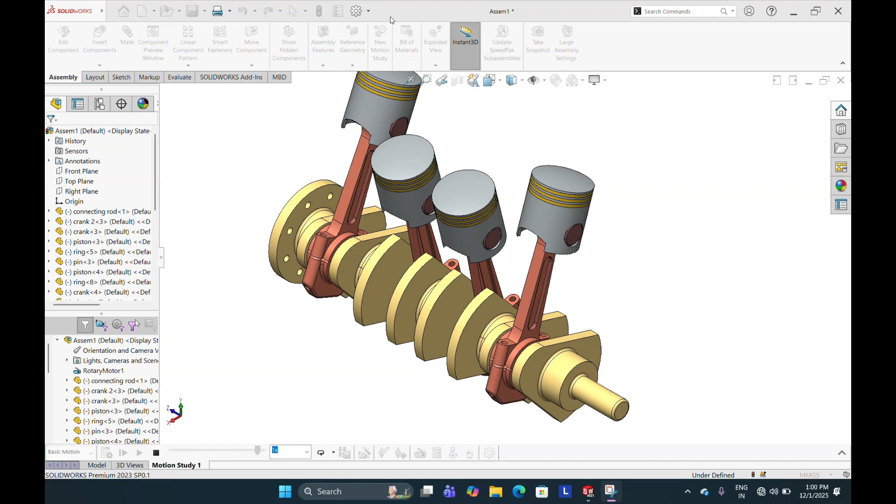Tutorial: I make a complete 4-cylinder engine assembly. Let's start by making the piston.

Select plane, sketch, circle, smart dimension 85 mm. Okay, go to feature, extrude boss, 90 mm.

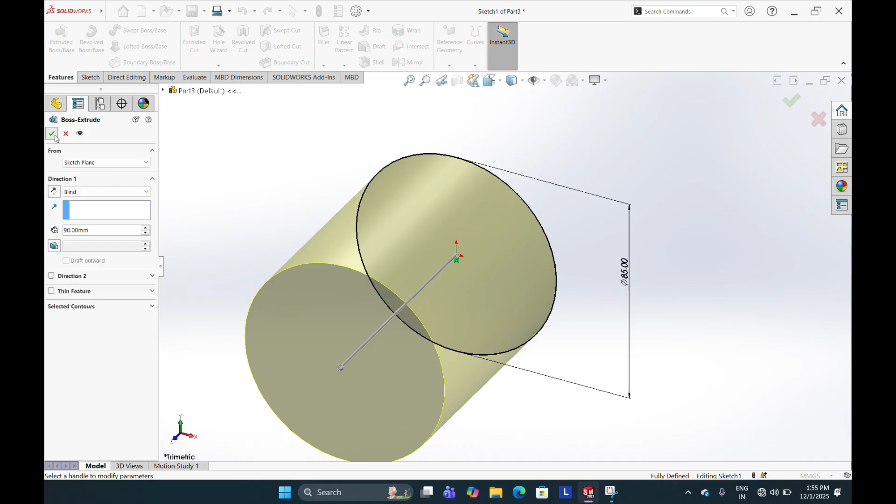Select sketch, select circle, smart dimension 79 mm. Okay, extrude cut, select offset 7.3 mm, blind 4.3, flip to inside cut. Okay.

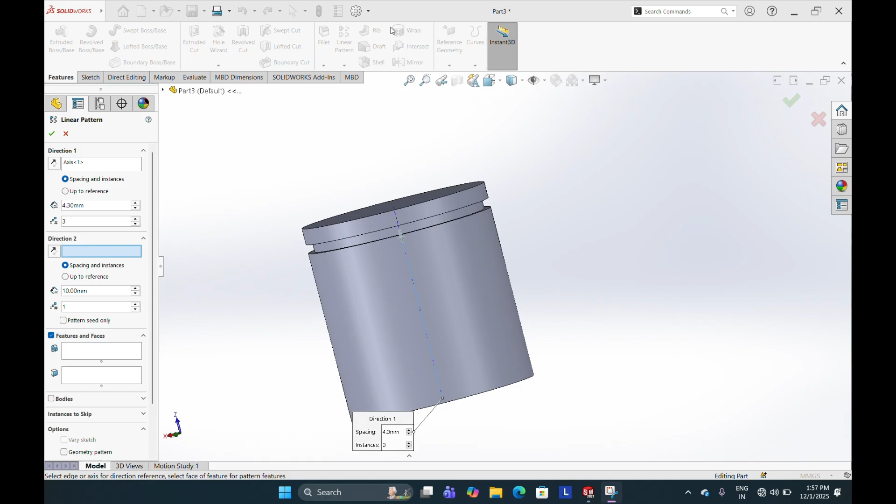Let's make a linear pattern. Direction, this direction. Select feature, this feature, 4.3 mm. Okay, hide this axis.

Five mm dome, and then 33.80 circle extrude cut, and the inner circle is 45 mm. Go to insert, feature, dome, select this face, 5 mm. Okay.

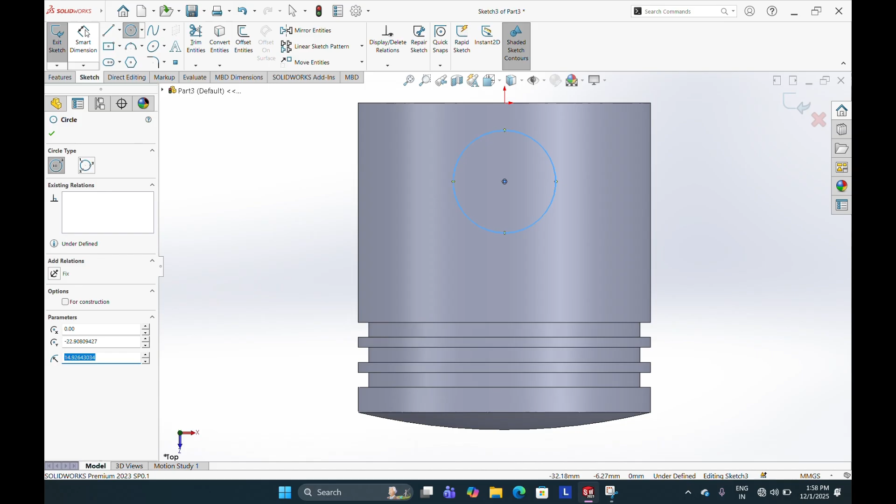Select sketch, 3 point, 80 mm distance. Okay, select mid plane. Okay.

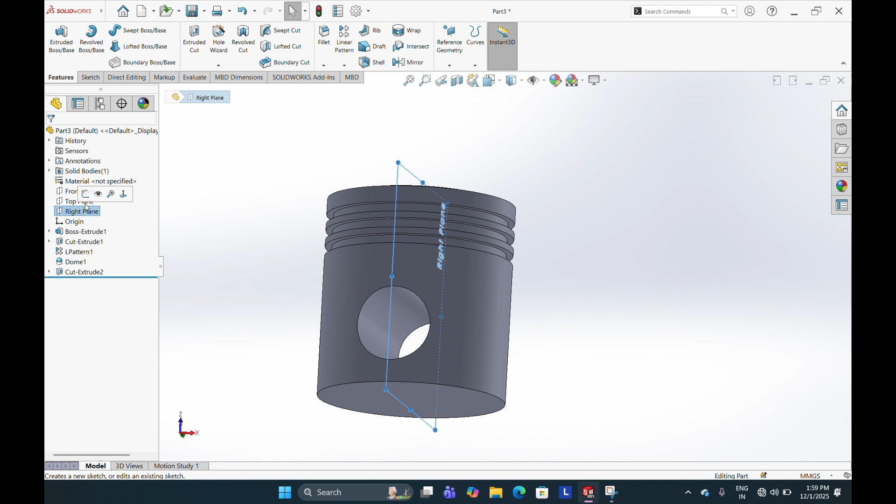Select sketch, line, smart dimension, 12 mm, 12 mm, 50 mm. Okay.

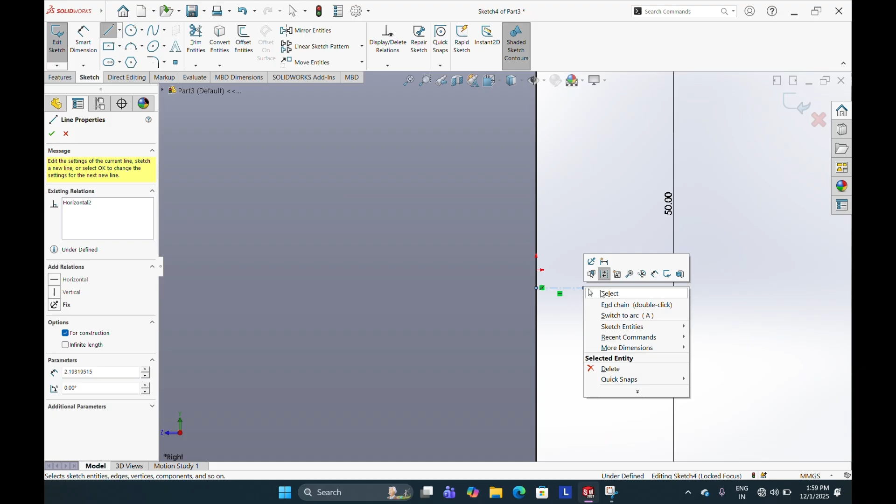Press Ctrl, select this line, make coincident. Okay.

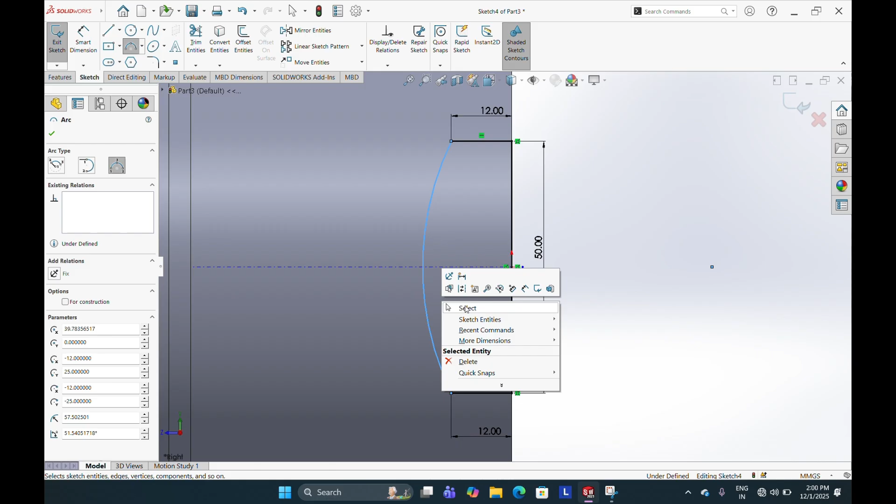Select 3-point arc, smart dimension, 40. Okay, extrude cut, okay.

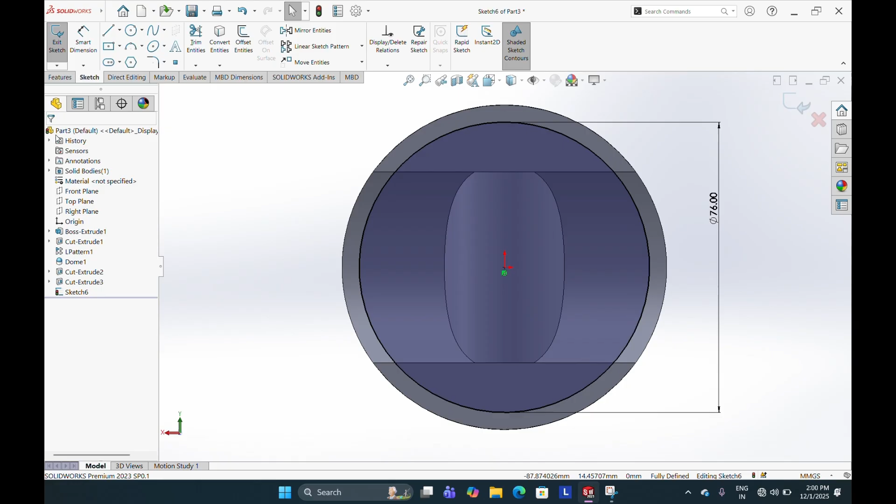Select sketch, 76 mm. Okay, go to feature, extrude cut, blind 85 mm. Okay.

Let's make the inner circle: from center to this distance 19 mm, and diameter 45 mm.

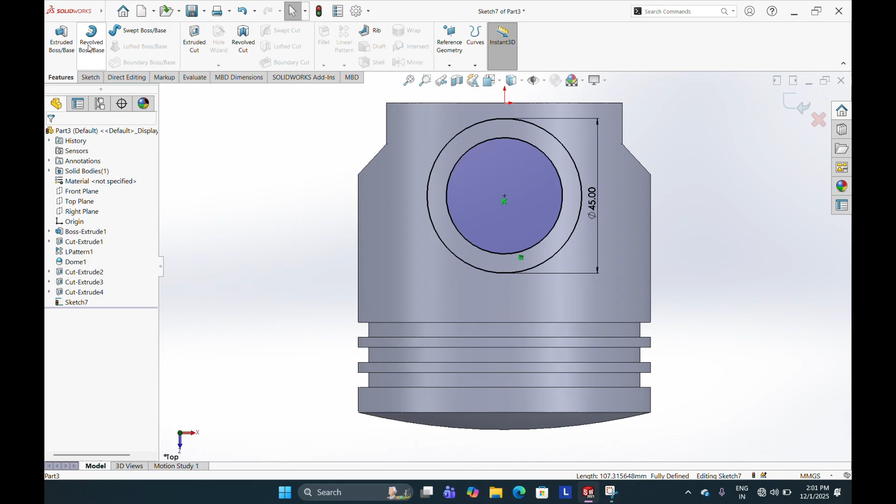Okay, select this sketch, convert entity, go to feature, extrude boss, up to next, select offset, 19 mm. Okay.

Let's mirror this feature to here. Select plane, top plane, feature to mirror this feature. Okay, our piston is ready.

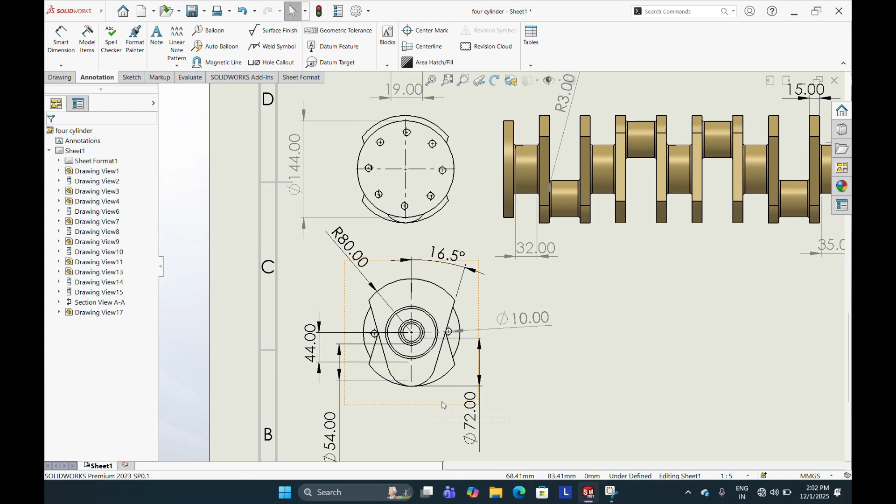Now make crankshaft. Control plus S for save. Control plus N for new part. Now let's start to make the crankshaft.

Select plane, sketch, circle, smart dimension 72. Okay, center line.

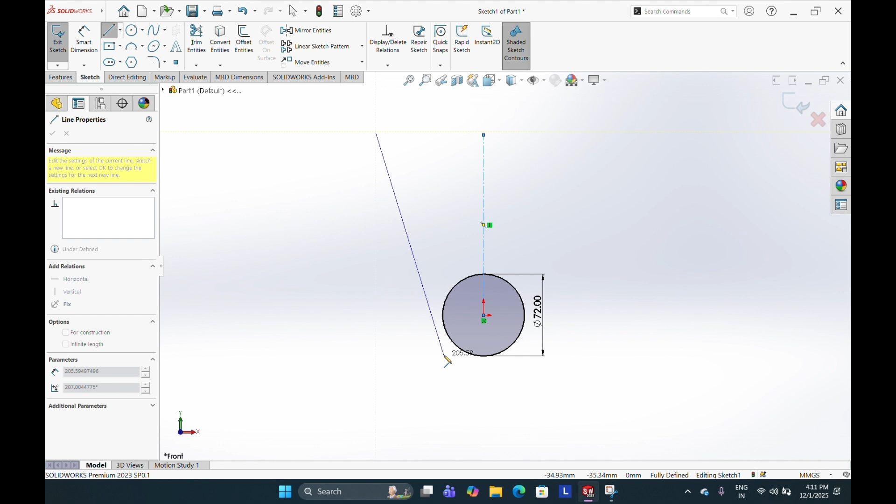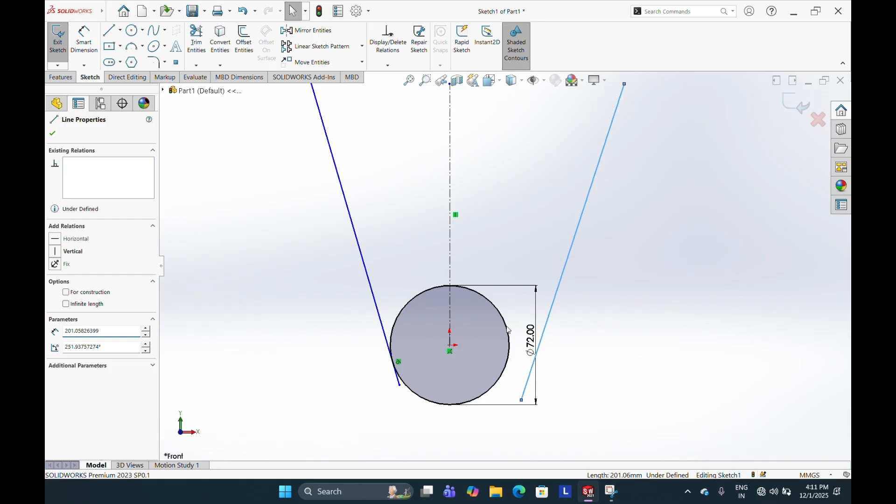Press Ctrl, select line, this edge, tangent. Okay, press Ctrl, select line, this line, tangent. Okay.

Press Ctrl, select line, this line, equal. 16.5 mm, 16.5 mm. Okay.

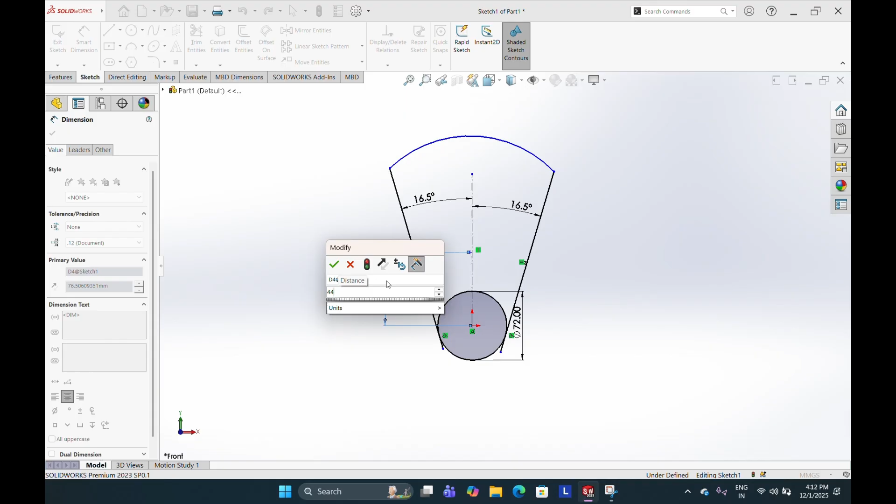Select 3-point arc, 44 mm, 80 mm. Trim entity. Okay.

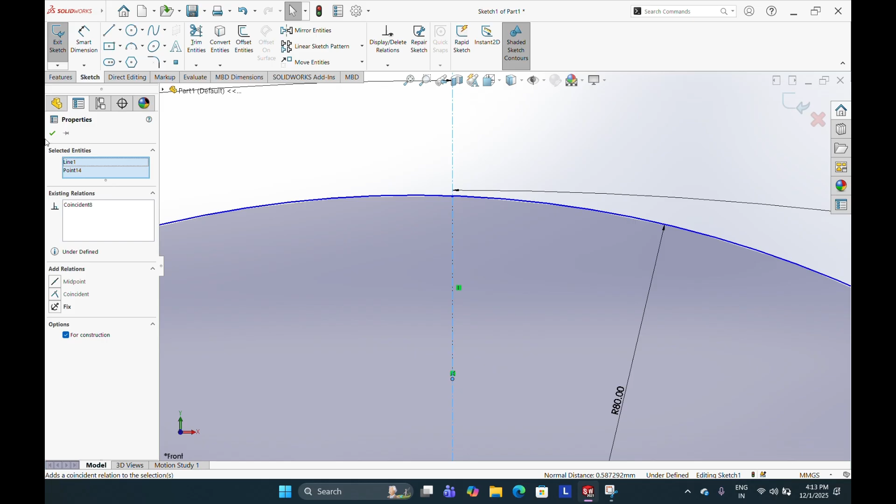Go to feature, extrude boss, 15 mm. Okay, select sketch, circle, smart dimension, 54 mm. Okay.

46 mm extrude boss. Okay, select sketch, circle, smart dimension, 72 mm, forty-four. Okay.

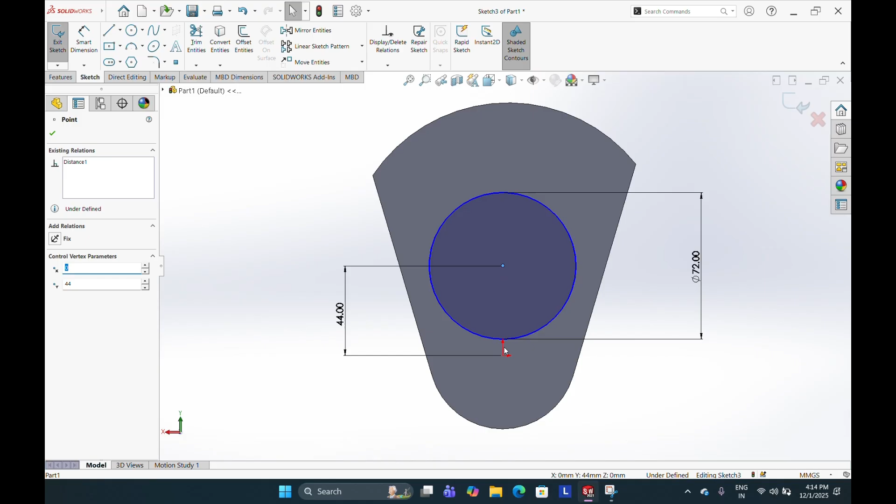Extrude boss, 38 mm. Okay.

Reference geometry, select plane. Okay, go to mirror, plane, this one, feature to mirror, this feature, this feature, and this feature.

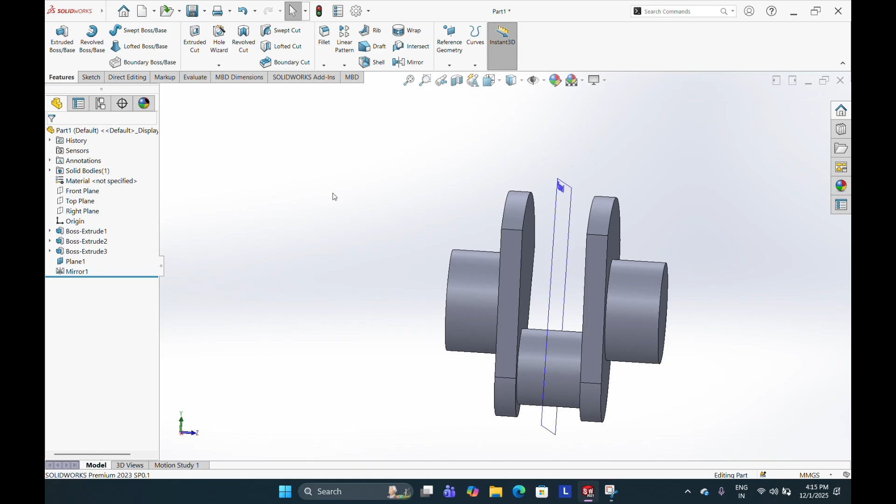Okay, hide this plane. Again select plane, this face, this face. Okay, mirror, plane tools, automatic select, feature, this feature, this feature, this and this.

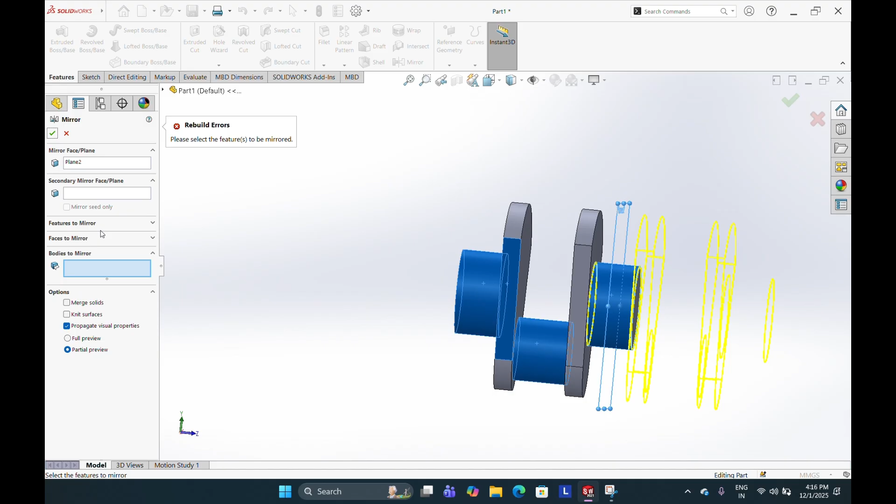Remove merge solid. Select body. Okay.

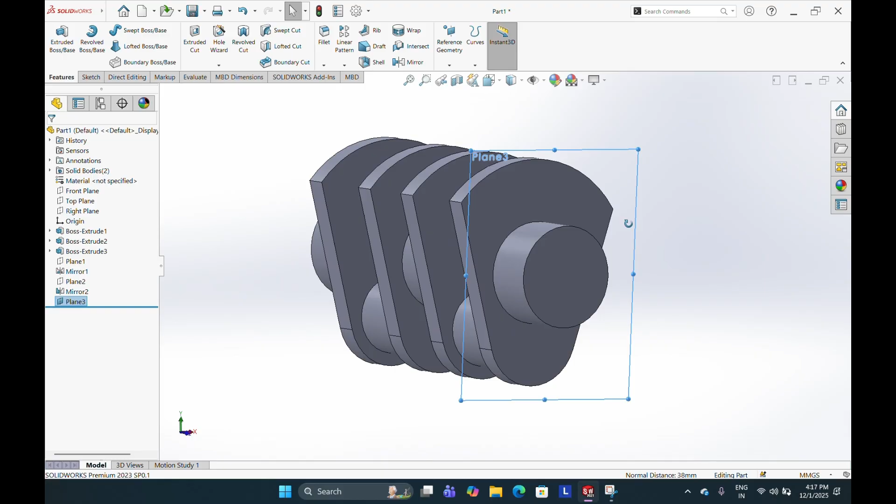Remove this face. Select plane again, this face, this face. Okay, mirror, body to mirror, this body, this body. Okay.

Go to direct editing, move copy body, or go to insert, feature, move and copy. Select this one and this one. Rotating angle 180 degrees. Okay.

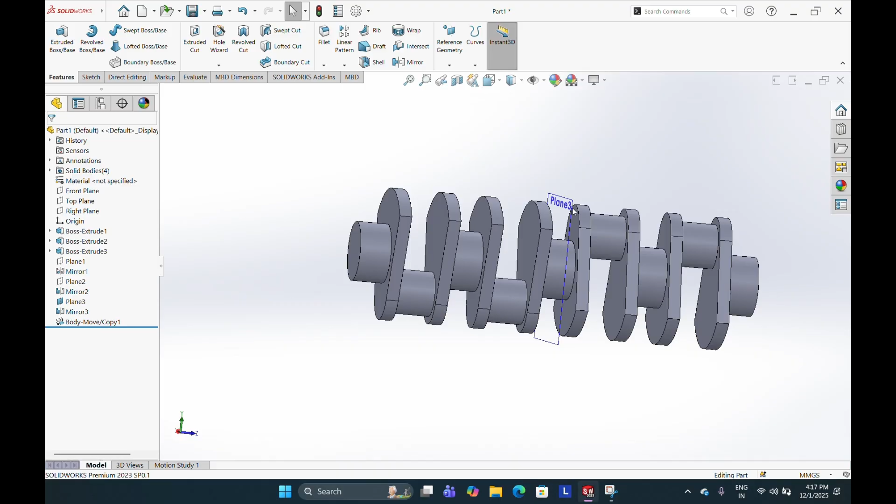Hide this plane. Select sketch here, 32 mm. Okay, go to feature, extrude boss, 80 mm. Okay.

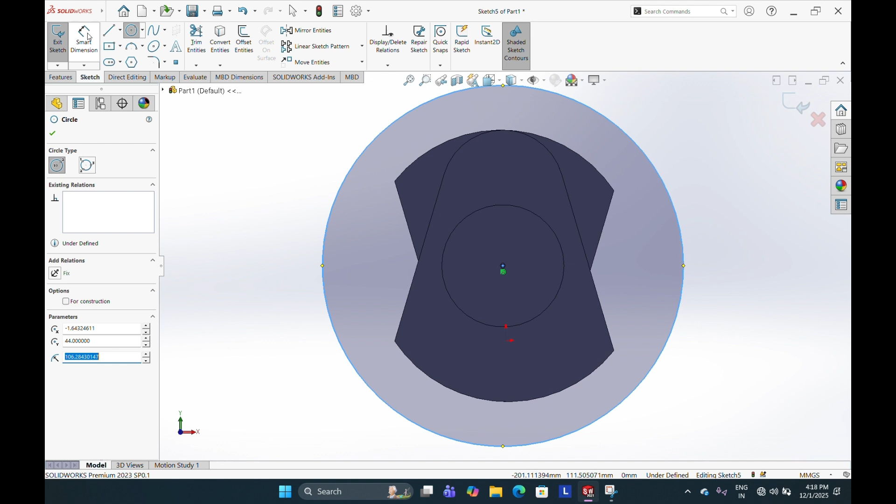Select sketch, smart dimension, 144. Select sketch, smart dimension, 110. Okay, select this construction for construction line. Okay.

Smart dimension, 10 mm. Okay, go to circular pattern, this point, entity to pattern, this entity, number of circular pattern 8. Okay, go to feature, extrude boss.

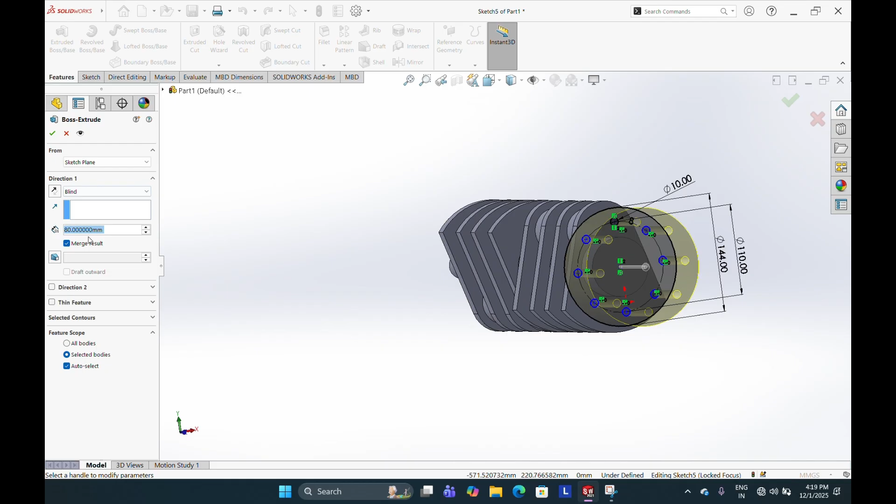15 mm. Okay, our crankshaft is ready.

Go to chamfer, select this edge, 2 mm. Okay, okay.

Select fillet, radius 3 mm. Select this edge and... okay.

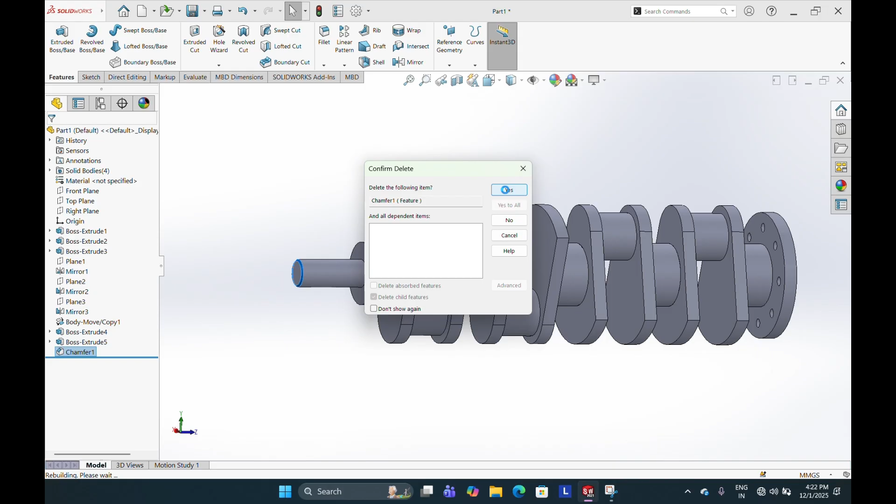Delete this fillet, chamfer, delete. Let's make combine first. Go to insert, feature, combine. Select this body, this and this.

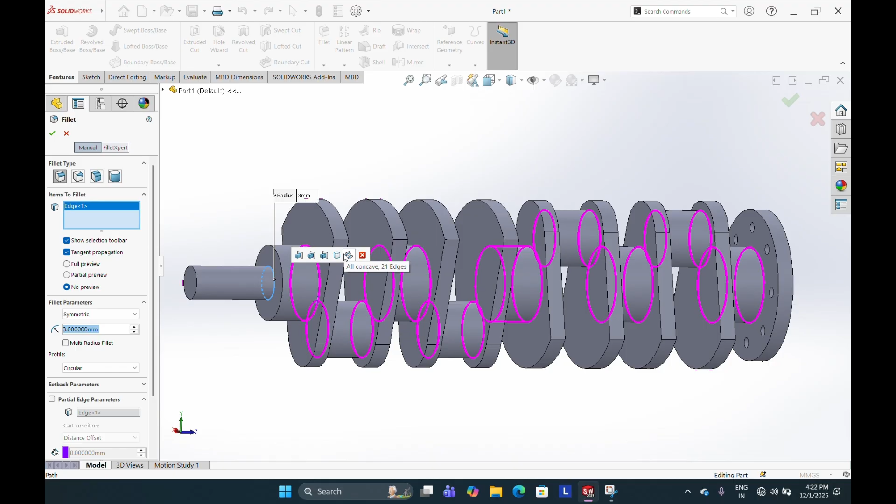Okay, let's fillet. Radius 3 mm. Okay, automatic, select all the line. Okay.

Let's chamfer here. Chamfer, distance 2 mm. Select edge. Okay.

Our crankshaft is ready. Now let's make the connecting rod. Select plane, sketch, circle, smart dimension.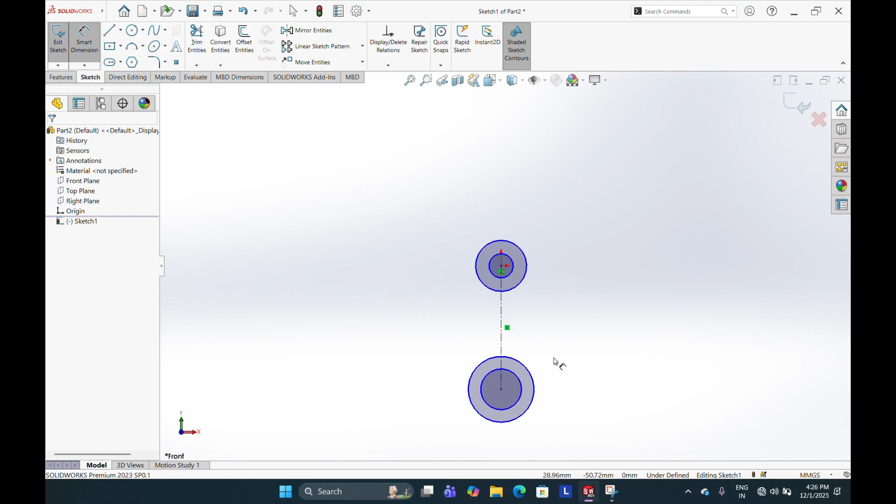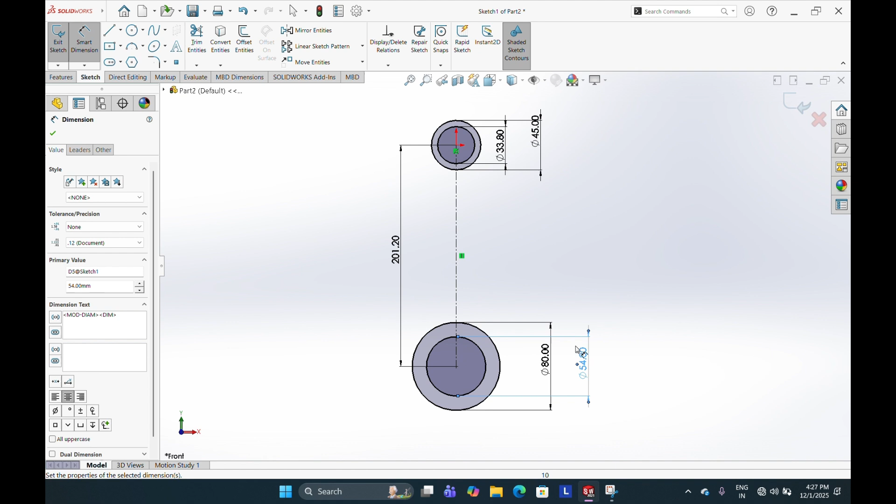45, 33.8, 80, 72, 54, 72. Okay.

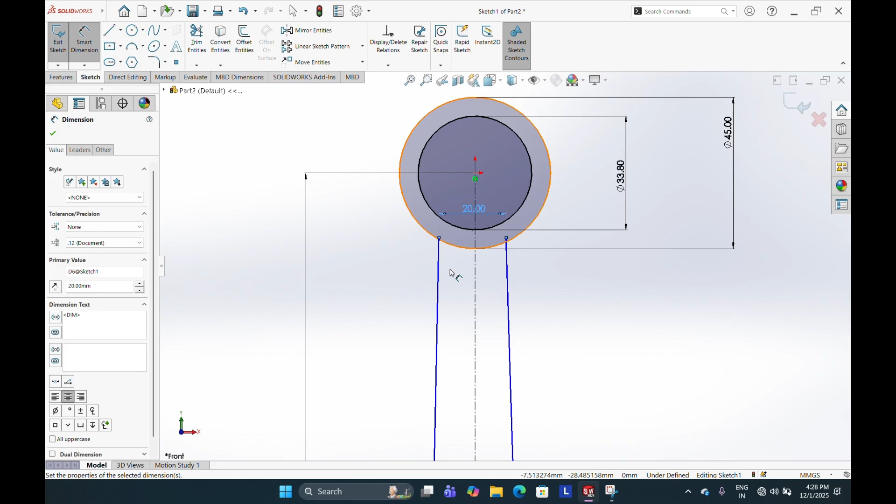Select line, delete this relation. Smart dimension, from this point to this point 20 mm, and here to here, 6 degree.

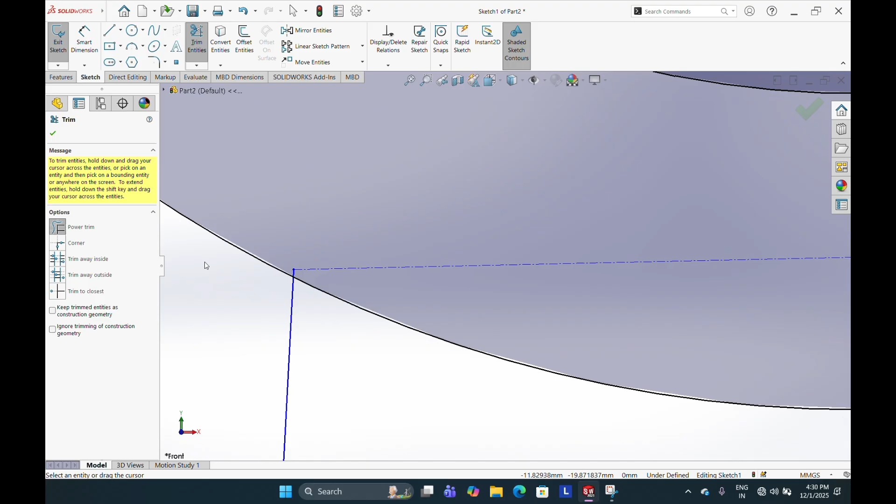Trim entity, trim this line, here, this one, and this. Okay, go to feature, extrude boss.

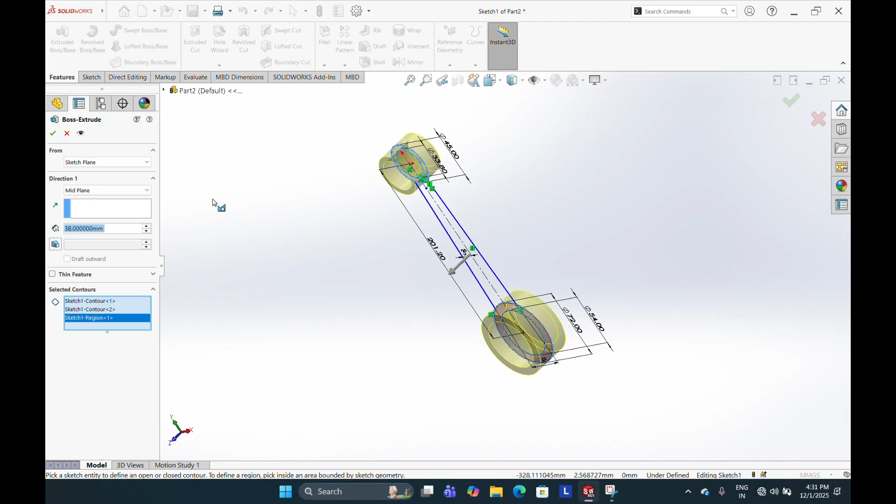38 mm, mid plane. Okay.

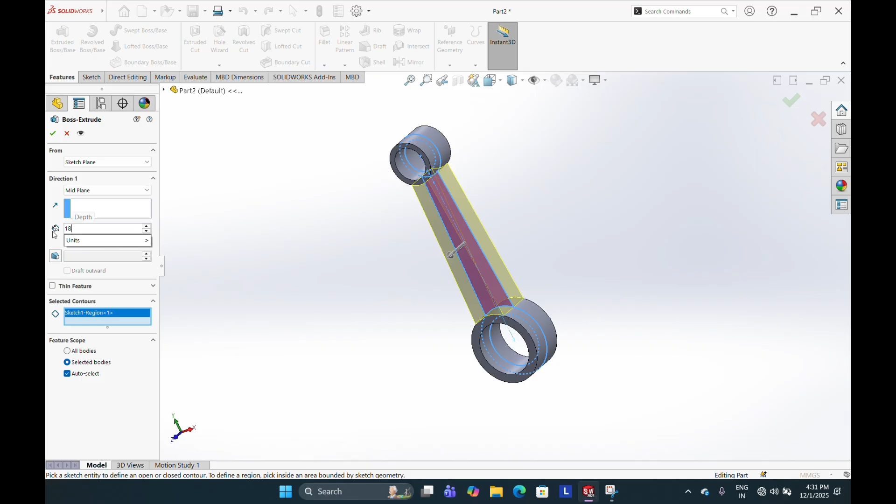Go to sketch again, extrude boss, this face, mid plane, 18 mm. Okay.

Go to fillet, select this edge and this edge, 22.5 mm. Okay.

Select fillet, this edge, 40 mm. Okay.

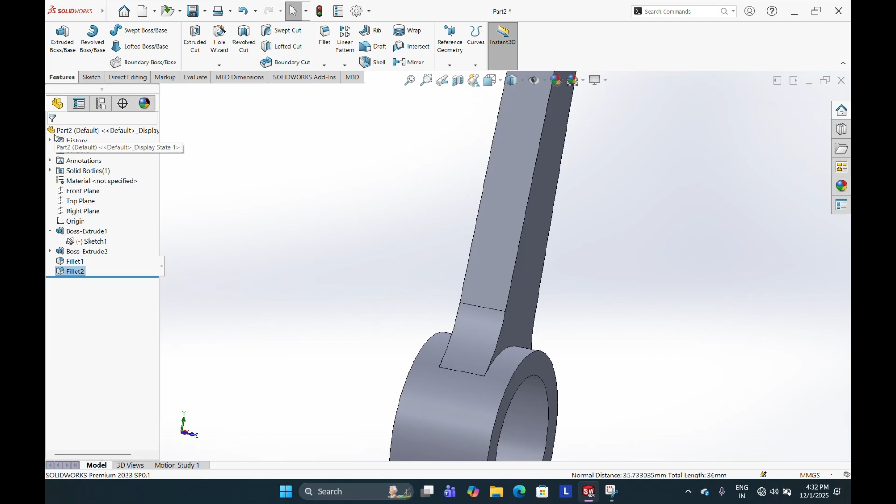Select this face, sketch, select center line, okay, center point straight slot, smart dimension.

90 mm, 8 mm. Okay, go to feature, extrude cut, 4 mm. Okay.

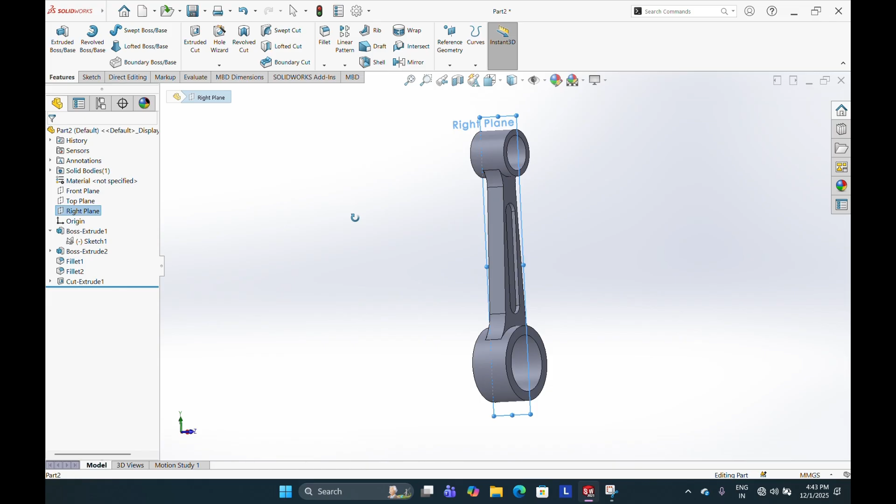Mirror, feature to mirror this feature to this side. Okay.

Our sketch is ready. Let's fillet, angle radius 1 mm. Select this face, edge, this edge and this edge. Okay.

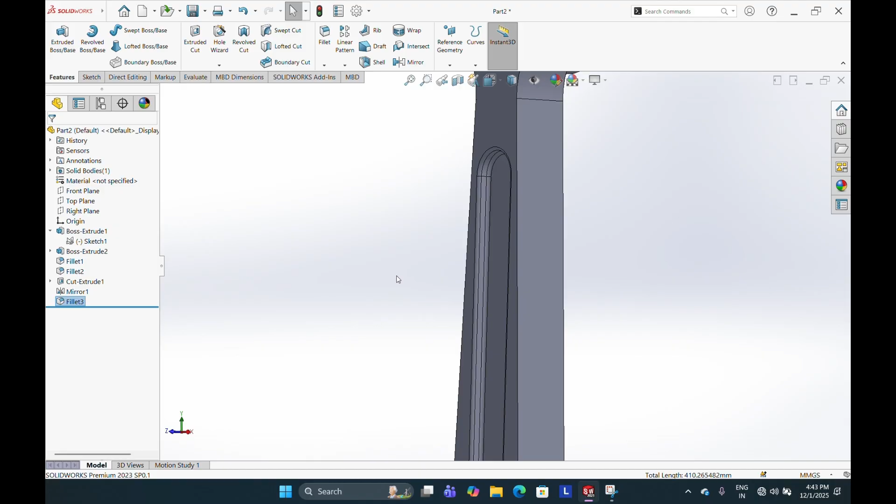Our connecting rod is completely ready.

Let's cut here. Sketch, okay, convert entities, this, okay, trim entity, okay.

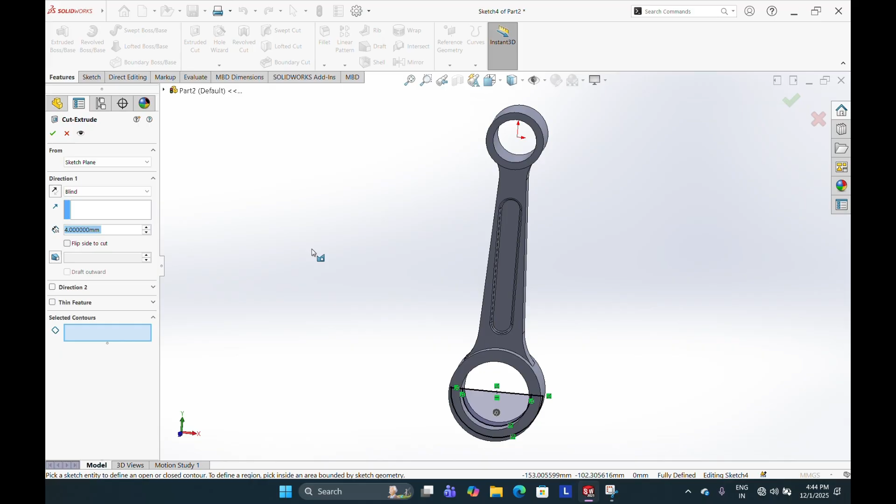Feature, extrude cut, select mid plane, okay.

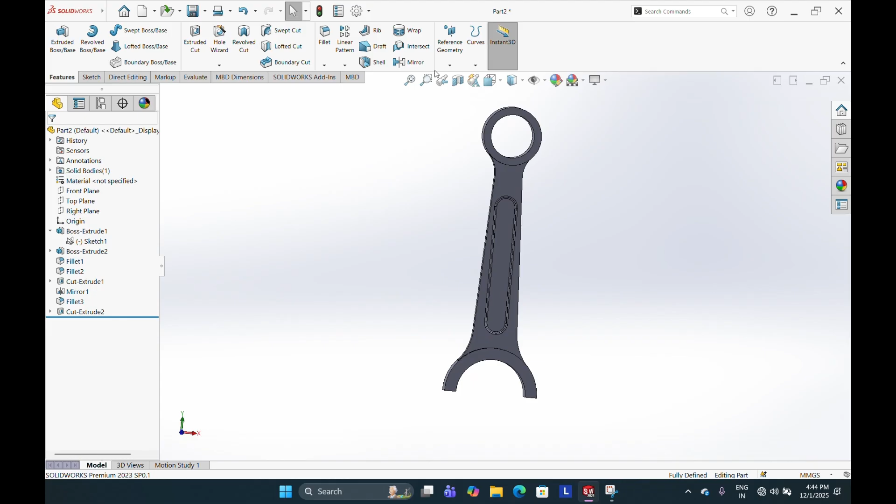Select plane from this face, flip the direction, 30 mm. Okay.

Select sketch, center point, straight slot, smart dimension, 76 mm, 9 mm.

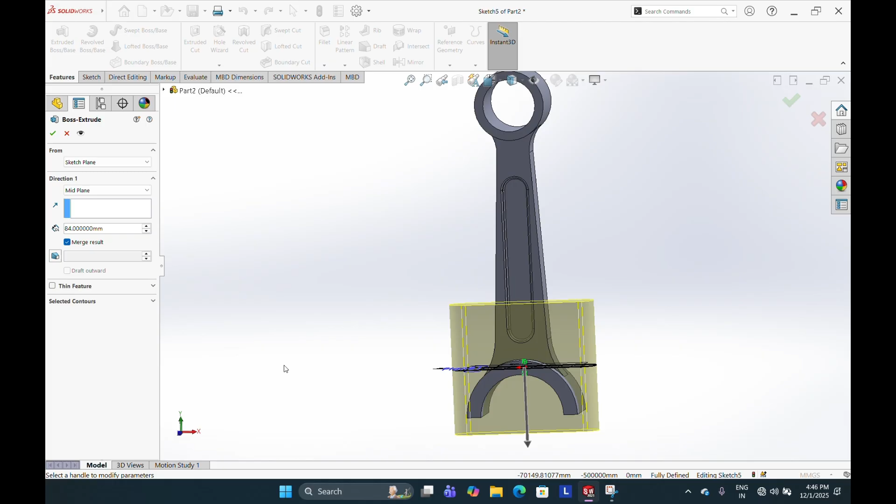Hide this plane, select here, sketch, convert entity, feature, extrude cut. Okay.

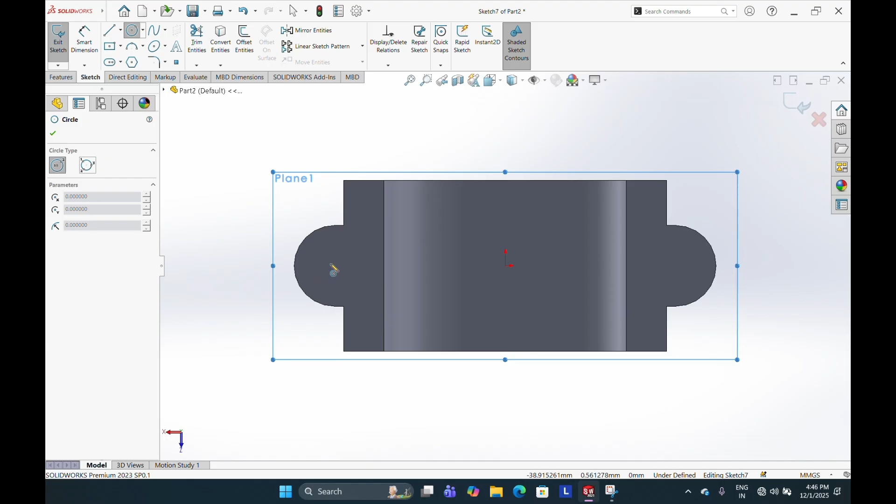Select this plane, sketch, make hole here, 9 mm, 9 mm. Okay, feature, extrude cut.

Blind, change the direction. Okay, our crankshaft is fully ready.

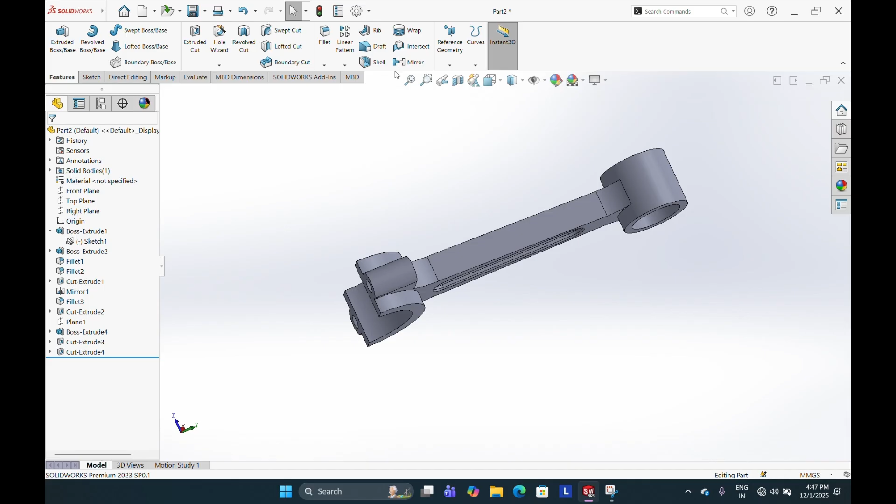Now make crankshaft lower part, this one. Select plane, sketch, circle.

Smart dimension, 72 mm, 54 mm. Okay.

Trim entity, okay, go to feature, extrude boss, blind, 38 mm.

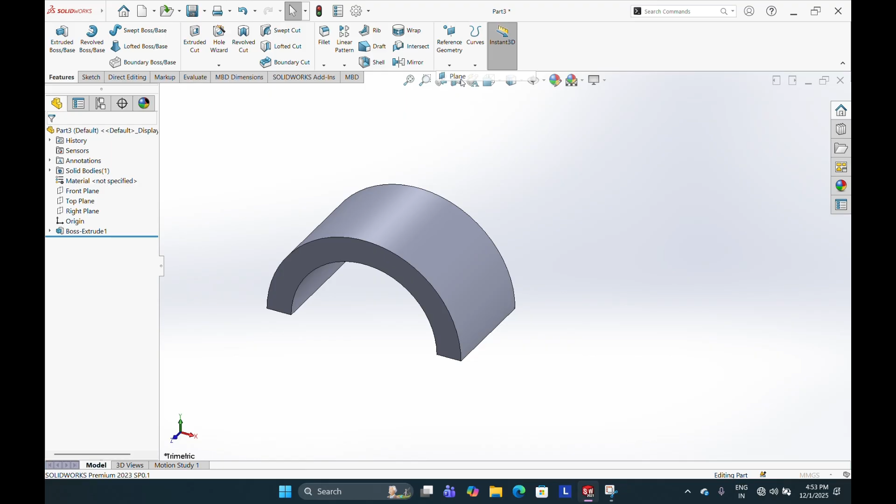Okay, select plane, this face, flip direction, 60 mm. Okay.

Sketch, select center point, center point, straight slot, smart dimension.

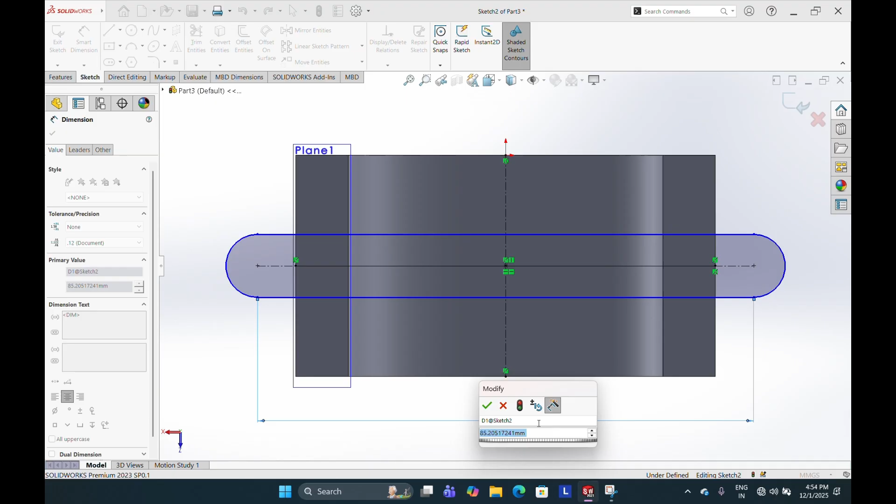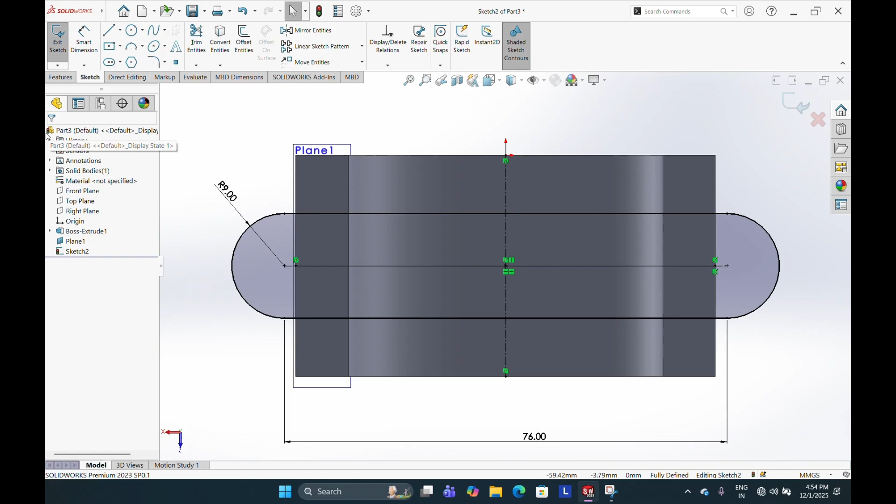76 mm. Radius 9 mm. Okay, extrude boss.

Up to surface, this surface. Okay.

Select plane, sketch, circle, draw two circle, smart dimension, 9 mm diameter. Okay.

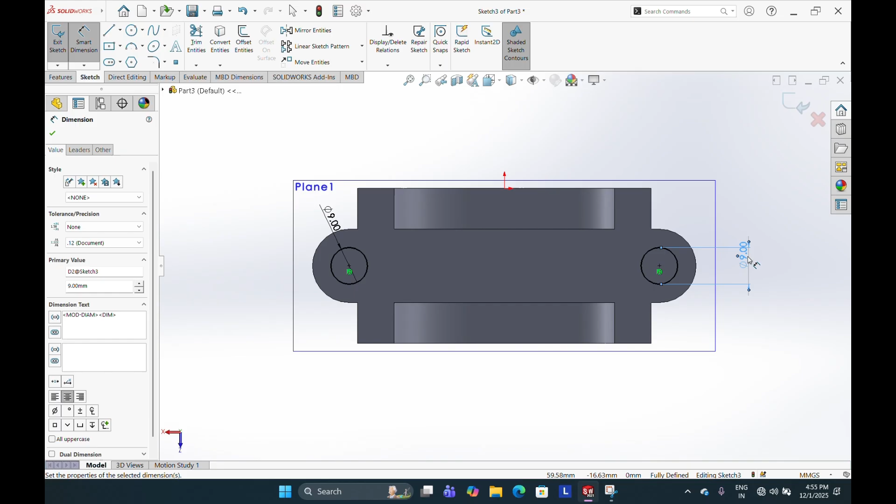Extrude cut, change the direction. Okay, hide this plane, sketch, convert entity, feature, extrude cut. Okay.

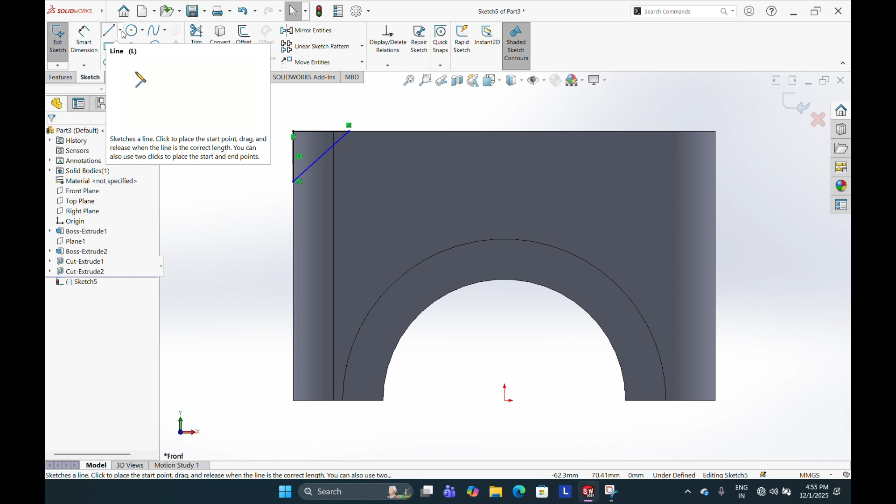Select plane, sketch, smart dimension, 27 mm, 22 mm, okay.

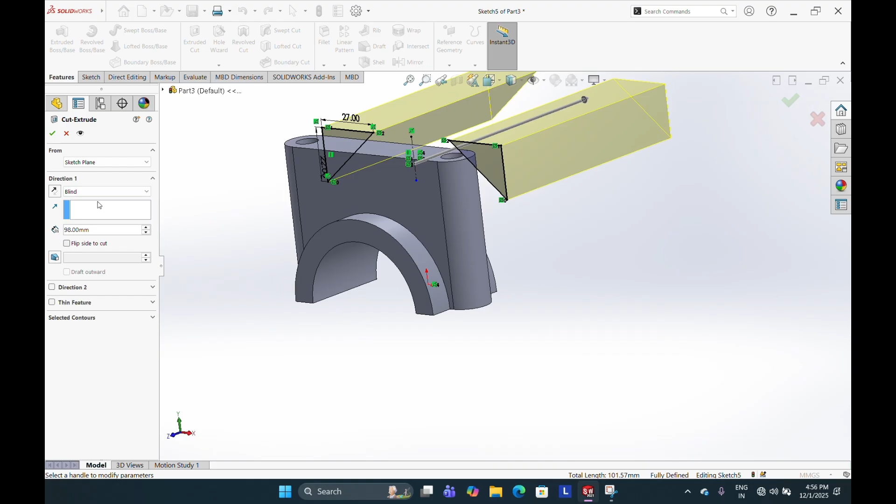Mirror this, mirror about this one, mirror, okay. Go to feature, extrude cut, select mid plane, okay.

Select fillet, this edge, 10 mm, okay.

Select fillet again, 3 mm, this face, okay.

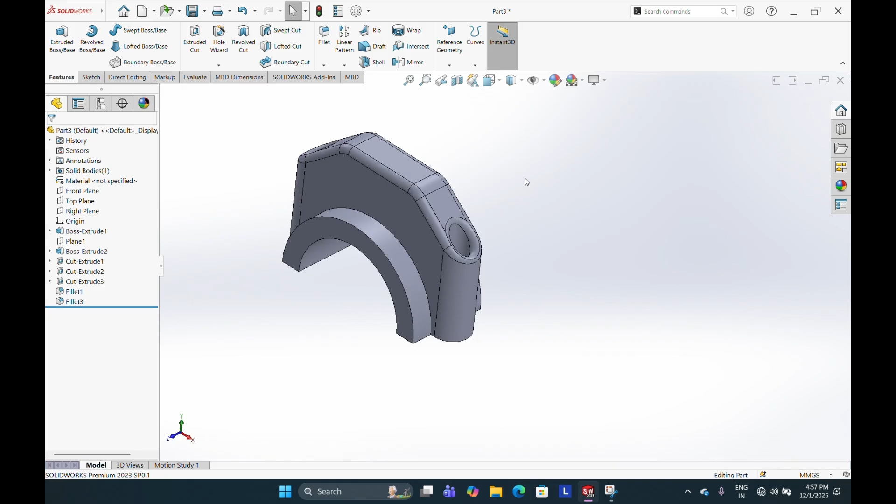Our crankshaft lower part is ready. Now make piston pin and piston ring.

Piston pin is 33.80 diameter and length 82 mm.

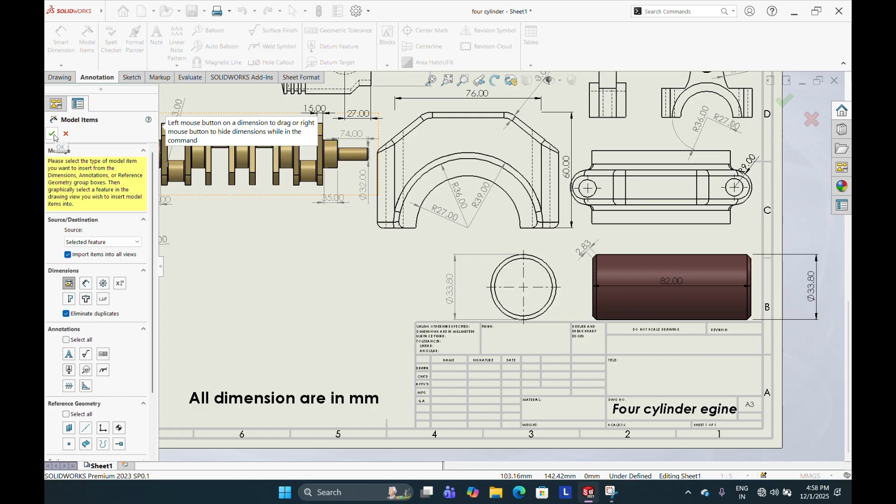Select plane, sketch, circle, 33.80 mm. Okay, go to feature.

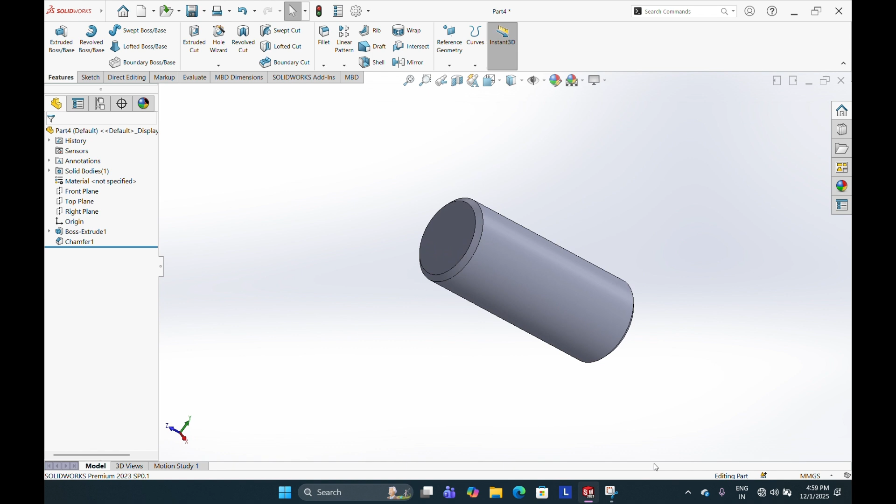Now make piston ring. Select plane, sketch, circle, smart dimension, 85 mm, 79 mm. Okay, go to extrude boss.

4.3 mm, mid plane. Okay, our piston ring is ready.

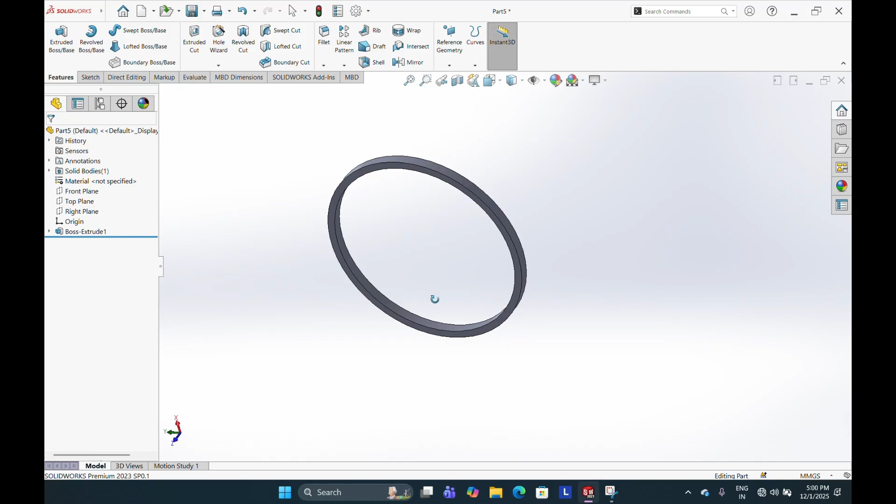Now all parts are ready. Now let's make assembly.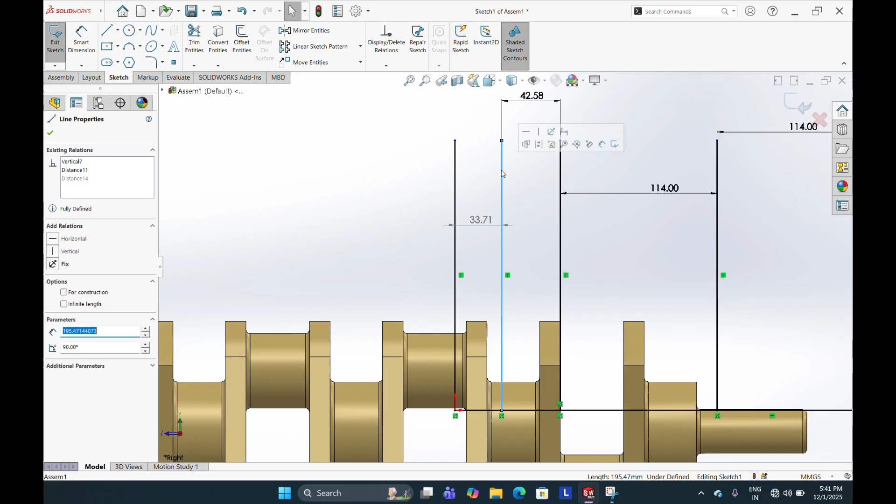Smart dimension, distance between this to this 156, from this to this 114, 114, 114.

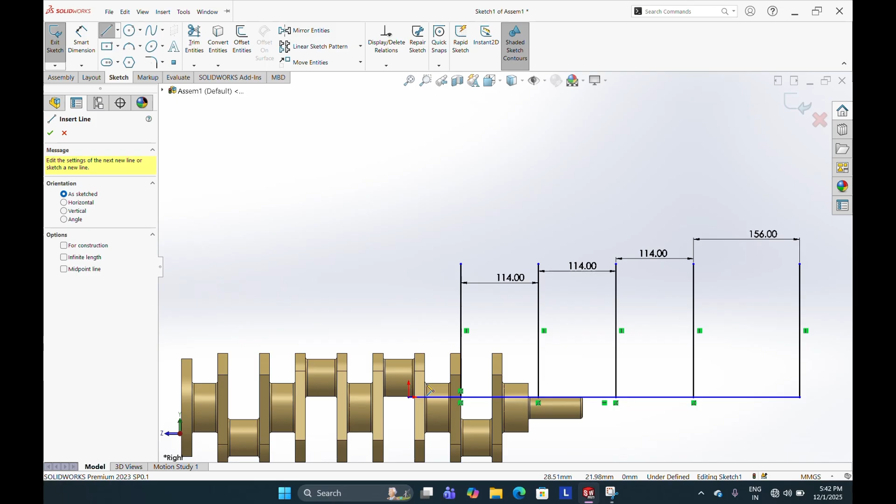91 mm. Trim extra part. Trim this line. Okay. Now make construction geometry. Exit.

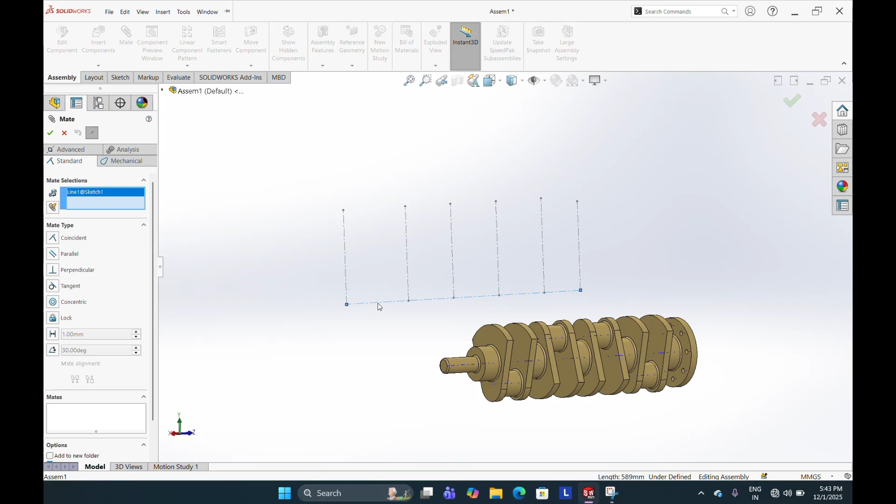Click left. Float this component. On temporary axis. Okay. Mate this line, this axis. Okay. This face and this point. Okay.

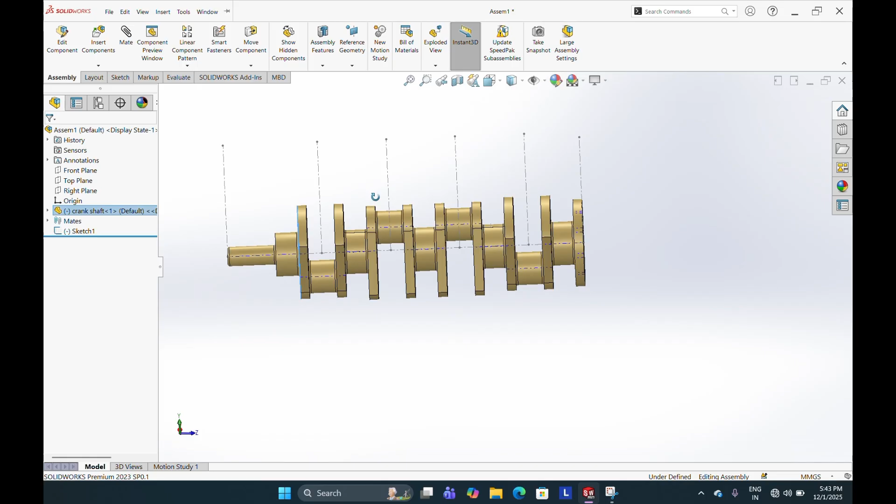Insert component, crankshaft, connecting rod, connecting rod lower part, piston, ring and piston pin.

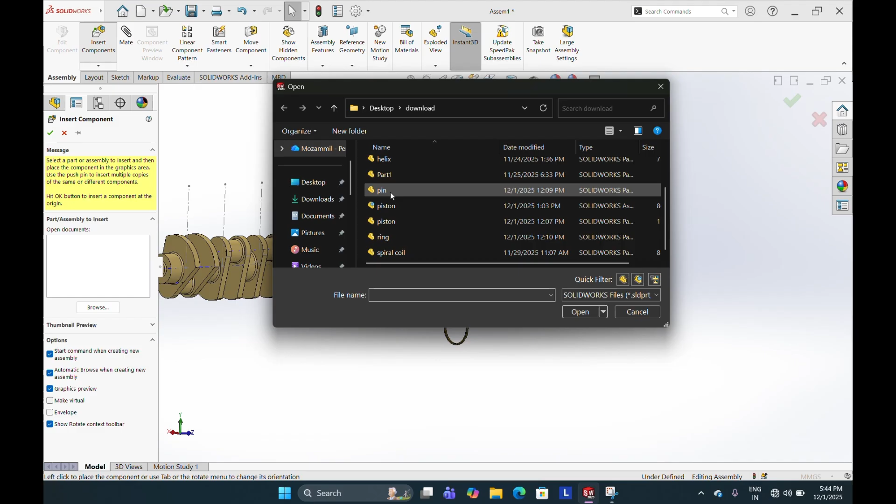This axis mate this axis. Okay. This axis, this axis. Okay.

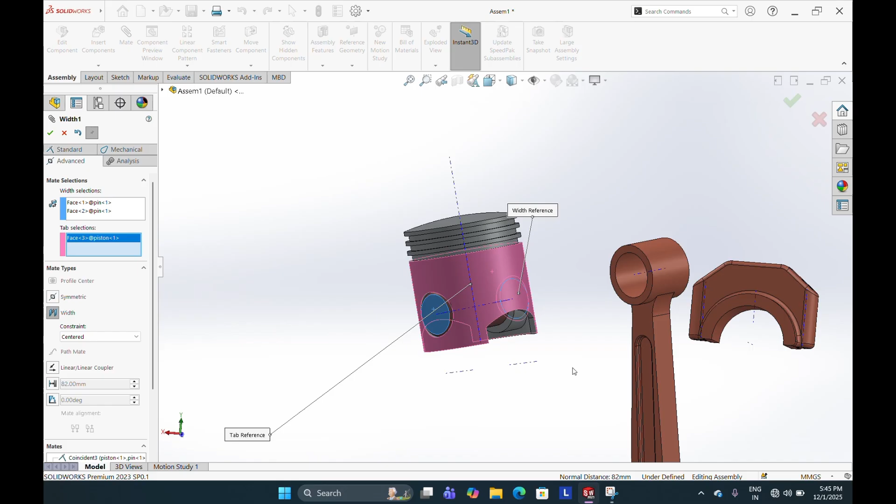Now go to advanced mate, width mate. This face and this. Okay.

This face and this. Okay.

Now rotate the piston ring and rotate this component.

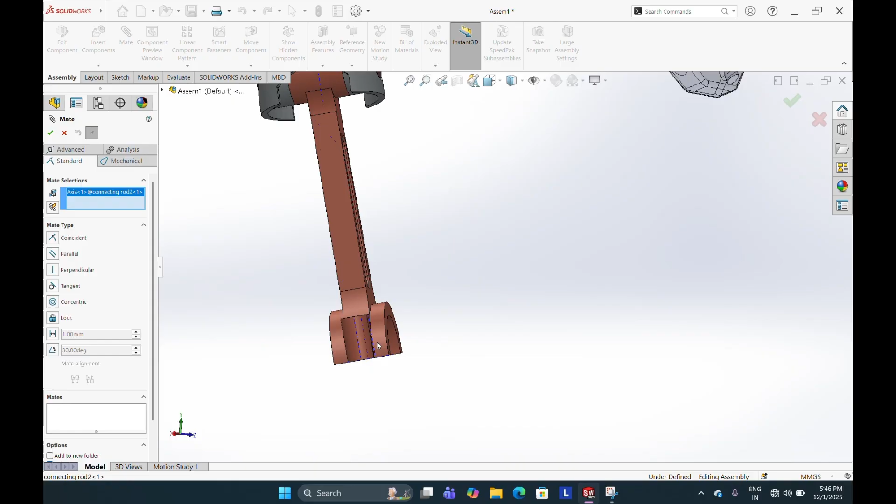Okay. Mate this axis to this axis. Okay. This axis. Okay.

This face. Okay. And this face. Okay.

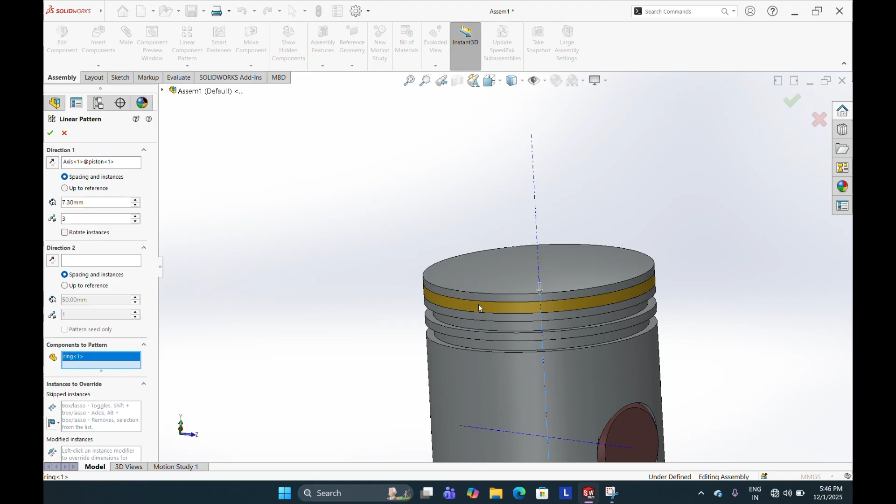Now linear component. Direction, this direction. Number of component 3. Distance 7.3. Component this component. Okay.

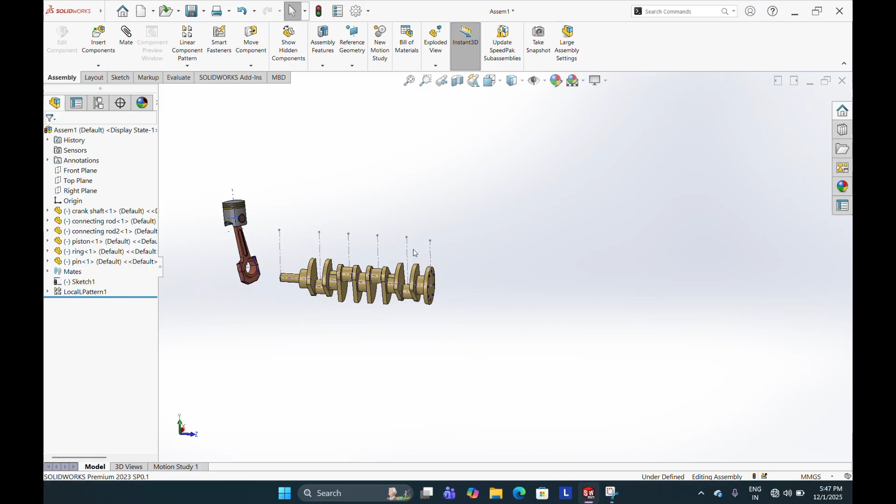Now this axis mate, this axis. Okay. Go to advanced mate, width mate, this face, this face, this face, and this face. Okay.

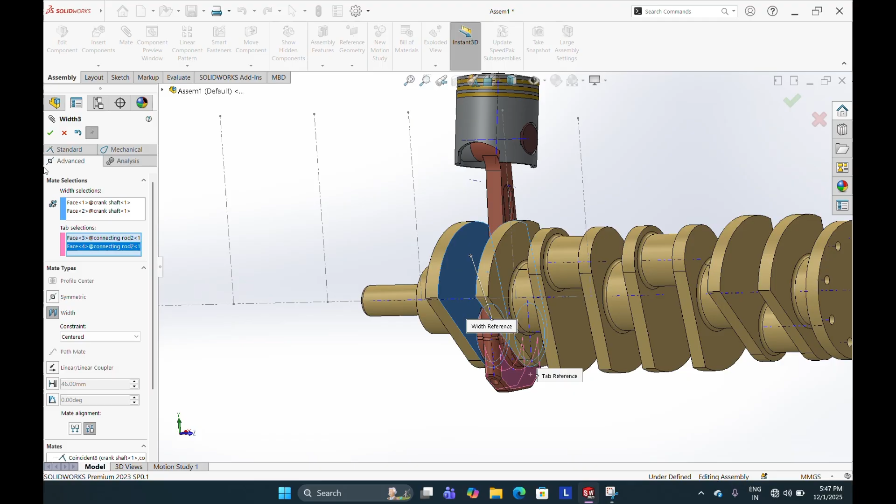Go to insert component, copy with mate, select mate, this, this, this, this, and this. Next, repeat.

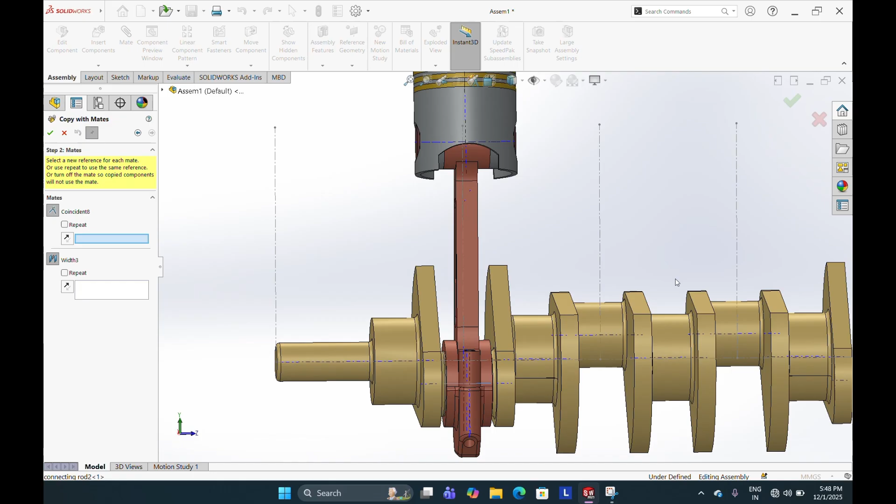Coincident here, and width mate, this face, this face. Okay.

Now again coincident, this axis, width mate, this face, this face.

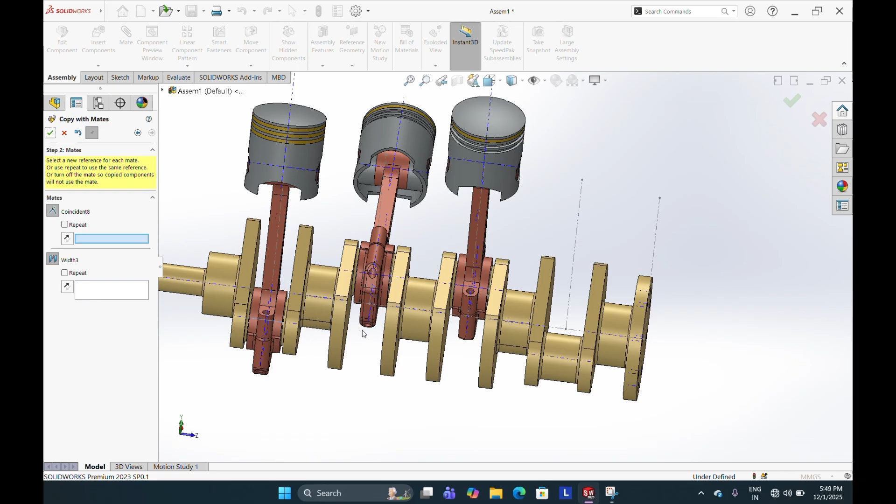Now again coincident, this axis, width mate, this face, this face. Okay.